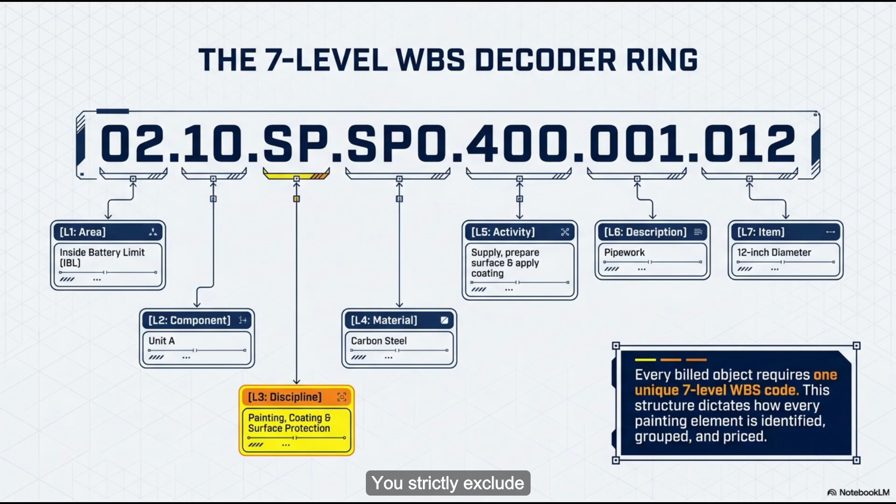And then you look at how they handle pipework, and the spatial logic just completely shifts. Well, pipework is a whole different beast. Yeah, the preambles say pipes are measured in linear meters along the center line, and you measure straight through inline fittings like bends, elbows, and tees. But, and this is the part that got me, you strictly exclude inline equipment like valves. Yep, valves are explicitly left out of that linear measurement.

Which, if I'm looking at this just from a geometric standpoint, an elbow joint is really just a bent cylinder. The surface area math is pretty constant compared to a straight pipe. But a valve is a topographical nightmare. It's a complete nightmare. I mean, a valve, especially a large motor-operated valve or a control valve, introduces massive mechanical complexity. Right, because of all the moving parts. Yeah, you've got exposed stems, moving actuators, flanges, really delicate seals.

A contractor applying heavy industrial epoxy can't just spray over a valve the way they would a straight run of carbon steel. Oh, because if you spray it, you just glue the whole thing shut. Exactly. If that coating fuses the valve stem, you've completely disabled a critical control mechanism for the entire pipeline. So the preamble forces a completely different pricing structure there. So how do they price it then? Valves are enumerated. You literally count them one by one, categorize them by diameter and type, and then you price that meticulous brush-applied labor completely separately.

Okay, that makes sense. But that brings us to the rule that seems to carry the most hidden financial risk for a contractor. Corrugated or profiled steelwork? Oh, yeah. This is a big one. The preambles literally state this material is measured strictly by its net plan or elevation area, meaning there is absolutely no extra allowance for the added surface area created by the peaks and valleys in the metal.

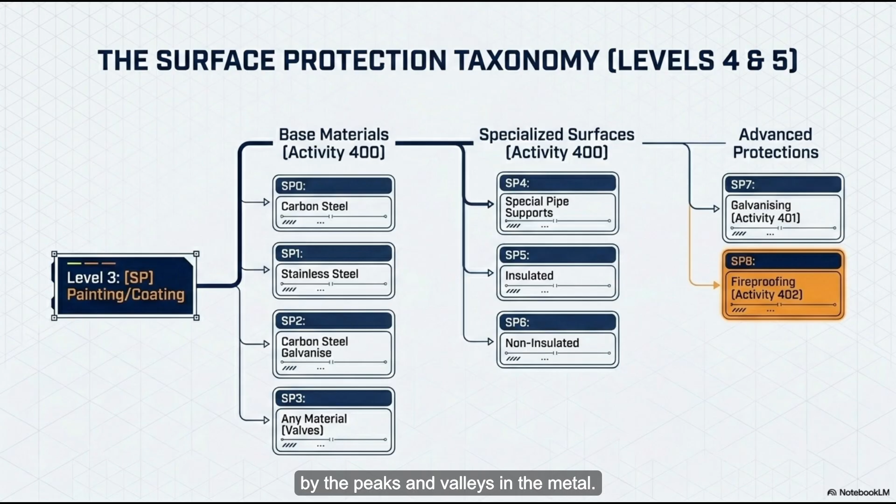Not at all. So wait, if I'm a contractor, it's like I'm agreeing to paint a flat piece of paper for $10. But when I show up on site, that paper is folded into a complex origami crane. That's a great way to put it. And I'm only getting paid for the 2D footprint of that crane. I just have to eat the cost of painting all those extra hidden folds. That is exactly what happens. The contractor is expected to understand the geometric reality of corrugated steel long before they even submit a bid.

Wow. Yeah, so if a specific profile of corrugated steel has a surface area that's, say, 1.4 times larger than its flat footprint, the contractor just has to know that. Yeah, they have to calculate that corrugation factor themselves, and then they bake the extra labor and material costs into their initial unit rate, because the client is literally just buying the coverage area on their blueprint. Exactly right. The burden of calculating the physical reality of the metal falls 100% on the contractor.

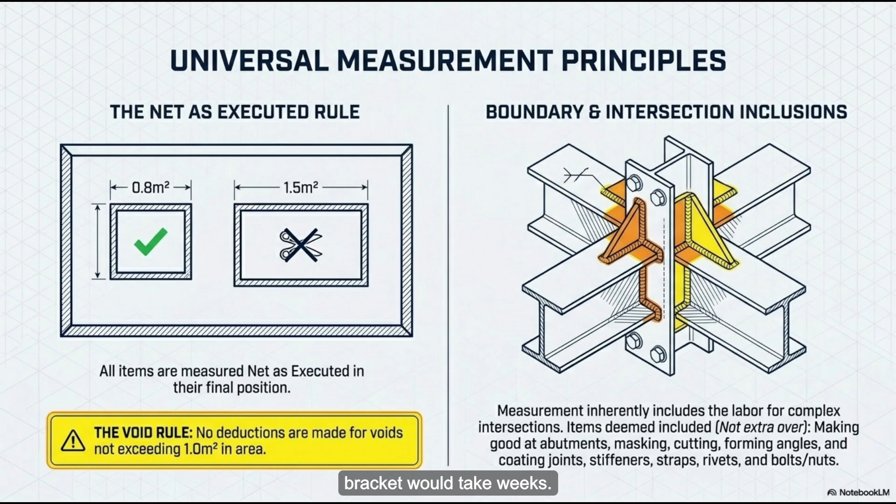And that burden even extends to how they categorize different objects, right? Like general structural supports are measured by weight in kilograms, but completed ladders and handrails are measured in linear meters. Yes, the physical metric literally changes based on what's the most efficient way to capture the labor cost. So weighing a bucket of hundreds of complex steel pipe brackets is a much more reliable proxy for the labor required to paint them, right? Because calculating the surface area of every individual tiny bracket would take weeks. Exactly. It's all about finding the most practical proxy for the work.

And all of these measurements eventually feed into what the contract calls a composite rate. The composite rate. Okay, let's talk about that. Because when an employer pays this rate for supply, prepare surface, and apply coating, the actual spraying of the liquid paint is basically the cheapest, fastest fraction of the entire job. It's the tip of the iceberg. The rate is actually funding this massive, incredibly strict scientific ecosystem of preparation and environmental control.

Right, let's unpack that prep phase. Because the preambles mandate that the unit rate covers solvent washing to strip away machine oils, and then it's followed by abrasive blasting to take the steel all the way down to its raw state. Yep, all the way to bare metal. I'm assuming this isn't just about making the metal look clean. There has to be a mechanical necessity for blasting the steel before you put epoxy on it. Oh, there is. Heavy industrial coatings just do not stick to smooth surfaces. They just slide right off.

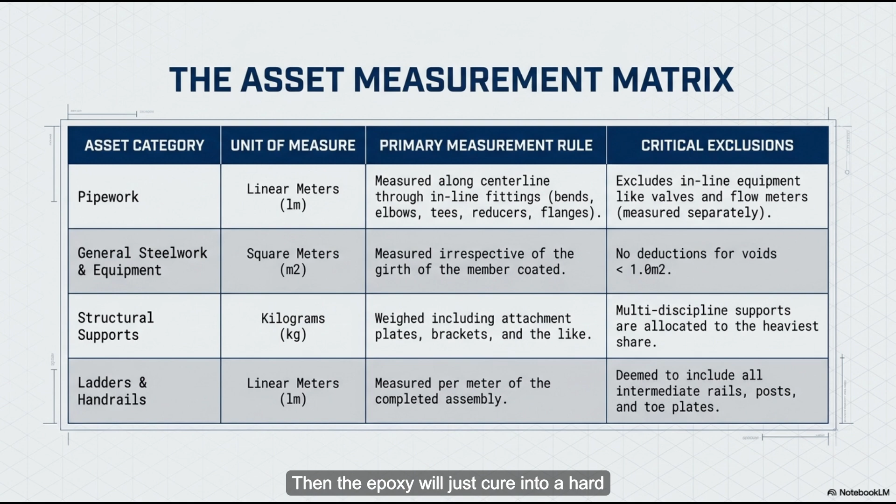Basically. So abrasive blasting fires grit at the steel at extreme velocities to create what we call an anchor profile. An anchor profile? Yeah, it microscopically shreds the surface of the steel. It creates these tiny jagged peaks and valleys. So the paint has something to hold on to? Exactly. When the epoxy is applied, it flows into those valleys and cures, and that creates a really profound mechanical lock with the steel substrate. And if you leave a little oil on the surface or you don't get a good anchor profile, then the epoxy will just cure into a hard shell that eventually peels off in massive sheets. It's a complete failure.

Good grief. And the preamble actually goes even deeper into risk mitigation during this prep phase. It specifically mandates the masking of welds. This is a really crucial detail. Right. The contractor has to carefully protect all the weld seams, leaving them totally uncoated until after the pipeline has undergone hydro testing. Right, because hydro testing is where they check the structural integrity of the pipe. They fill the completed pipeline with water and pressurize it to levels far beyond its normal operating capacity. So they're stress testing the welds, but why can't the welds be painted first?

Because if a contractor applied a really thick, high-build epoxy coating over a weld before that pressure test, the coating is actually strong enough to temporarily plug a micro crack in the weld. Wait, really? The paint is that strong? It is. So the pipe would pass the pressure test and then go into live operation carrying hazardous chemicals. Oh, no. And eventually, the crack would propagate right through the paint, causing a catastrophic failure.

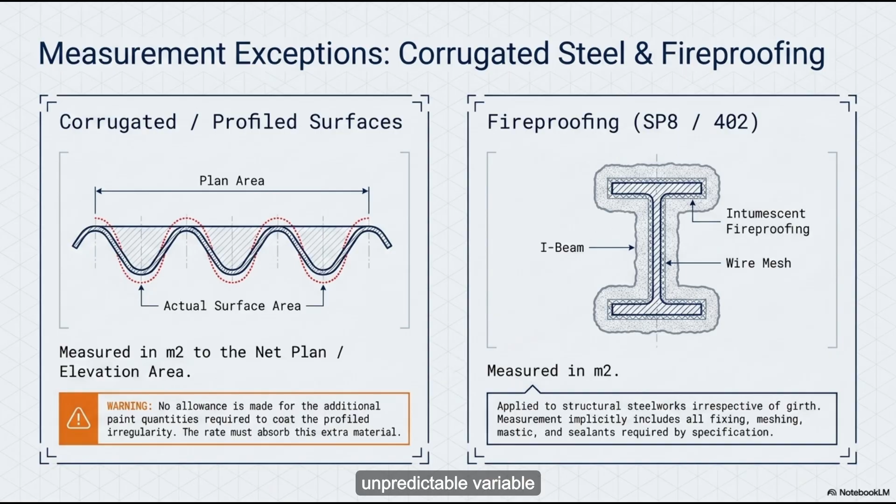That is terrifying. So the contractor is essentially being paid to not paint, wait for the mechanical engineers to stress test the system, and then mobilize their crews a whole second time just to unmask, prep, and coat those specific weld lines. Yep. It's a massive logistical dance. And honestly, this entire dance is governed by what might be the most unpredictable variable in the whole contract. Which is what? The weather. Exactly. Ambient conditions. The composite rate explicitly includes testing to ensure compliance with temperature, relative humidity, and the dew point.

Does this mean the painting contractor is legally and financially on the hook if the humidity or temperature is wrong on painting day? Like they have to act as local meteorologists. They absolutely do. And the dew point is the really critical metric here. Okay, break that down for us. Why the dew point? Because paint curing is a chemical reaction that is highly sensitive to moisture. If the temperature of the raw, freshly blasted steel is too close to the dew point of the surrounding air, invisible condensation forms on the metal. So the steel looks dry, but it's actually wet. Exactly.

So the contractor isn't just applying paint to steel. They're unknowingly applying paint to a microscopic layer of water. And I'm guessing the epoxy doesn't like water. Not at all. The epoxy will happily bond to the water instead of the steel anchor profile we just talked about. Oh, wow. And the moment that moisture evaporates or the steel expands under the hot sun, the coating completely fails. And because the FIDIC contract legally embeds that compliance with ambient conditions directly into the unit rate, the contractor absorbs the entire cost.

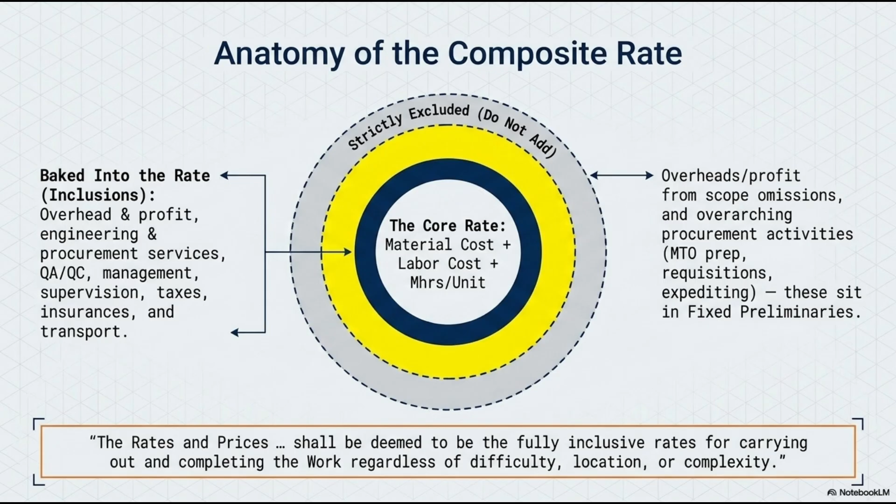If they rush a job on a morning with high humidity and the coating fails an adhesion test 2 weeks later, they pay for it all. Erecting the scaffolding, reblasting the steel down to bare metal, reapplying everything, all out of pocket. That's insane. You're managing hundreds of workers, coordinating with pipe layers, and your entire profit margin is tethered to a literal hygrometer. It really is.

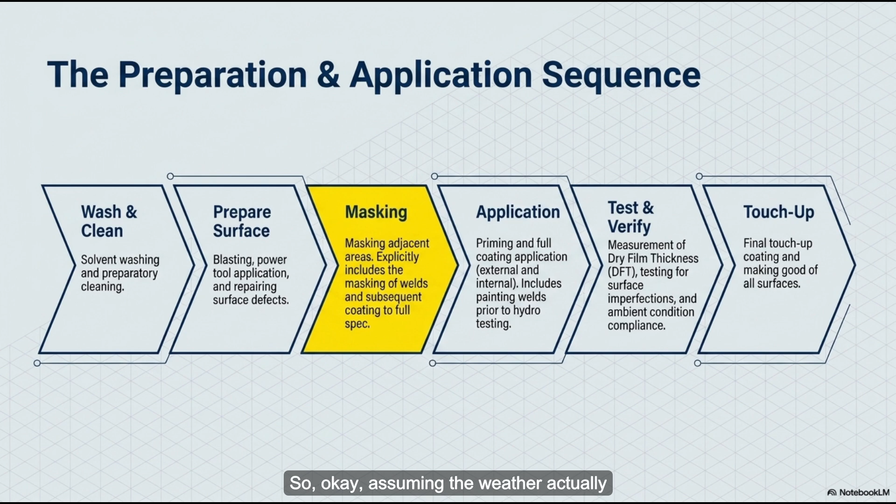So, okay, assuming the weather actually holds and the surface is prepped perfectly, the contractor then has to navigate the WBS codes. Right. A work breakdown structure. Yeah, this is a 7-level alphanumeric matrix that categorizes every single physical object on the site. And level 4 codes specifically dictate the chemical approach, right? Like you have SP0 for carbon steel, SP1 for stainless steel, SP2 for galvanized carbon steel. Yeah, the WBS code is basically a translation layer between the engineering reality on the ground and the financial ledger.

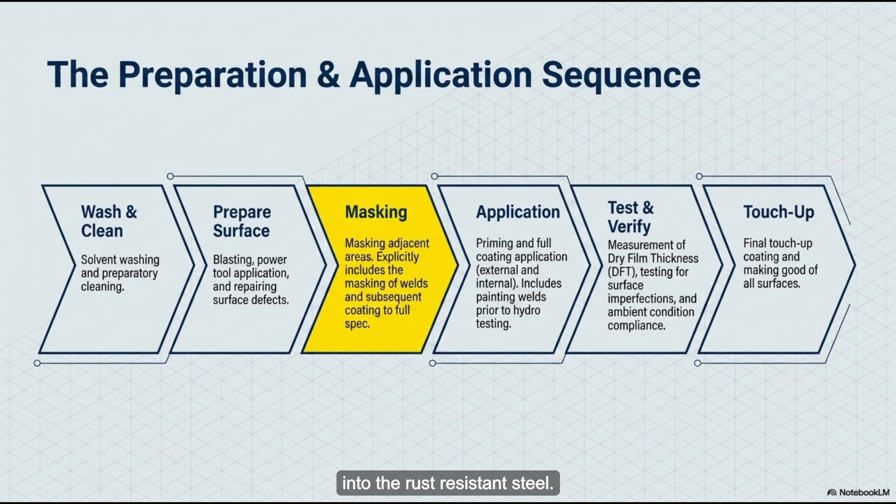Why do they need to separate them out so strictly, though? Paint is paint, right? Well, you cannot treat carbon steel and stainless steel with the same abrasive blasting protocol. Oh, really? Why not? If you blast stainless steel with the same aluminum oxide or steel grit that you just used on a carbon steel pipe, you will actually embed free iron particles into the stainless surface. Wait, so you're basically shooting rust into the rust-resistant steel? Exactly. You will essentially infect a rust-resistant alloy with rust. It completely ruins the material.

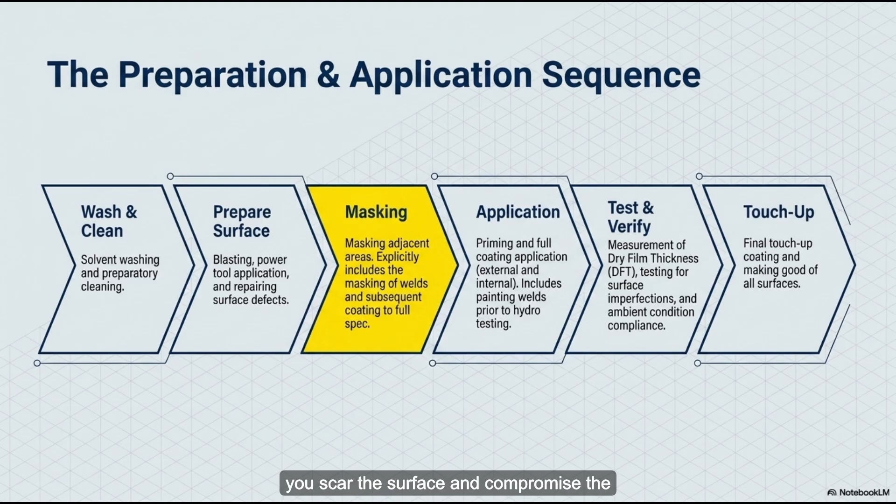Oh, man. It's similar to the strict protocols in a high-end commercial kitchen, right? Like, if you use a metal spatula on a cast iron skillet, it's totally fine. Right. But if you absentmindedly use that exact same metal spatula on a Teflon-coated pan, you scar the surface and compromise the entire nonstick function. That is a perfect analogy. The WBS codes ensure you never bring the wrong tool or chemical to the underlying substrate.

And the granularity of these codes is just staggering. I was looking at level 7, which categorizes pipe diameters. The schedule literally lists WBS codes starting at a tiny 1/4-inch pipe and goes line by line all the way up to massive 44-inch pipelines. And there's a very good reason for that. The labor mechanics shift drastically across those different diameters. How so? Like big pipe equals more paint? It's more about how you apply it. A 44-inch pipe presents a massive, relatively flat curve. So a painter can efficiently use industrial spray equipment to coat large sections really rapidly. Very little paint is lost to overspray. Right, because it's a huge target.

Exactly. But a 1/4-inch pipe, that's essentially just a thin line hanging in the air. So if you spray it, you waste a tremendous amount of incredibly expensive coating directly into the wind. So for those, the contractor often has to rely on slower, meticulous brush or roller applications. Oh, I see. So the WBS code isolates that specific inefficiency so the contractor can price the manual labor accurately.

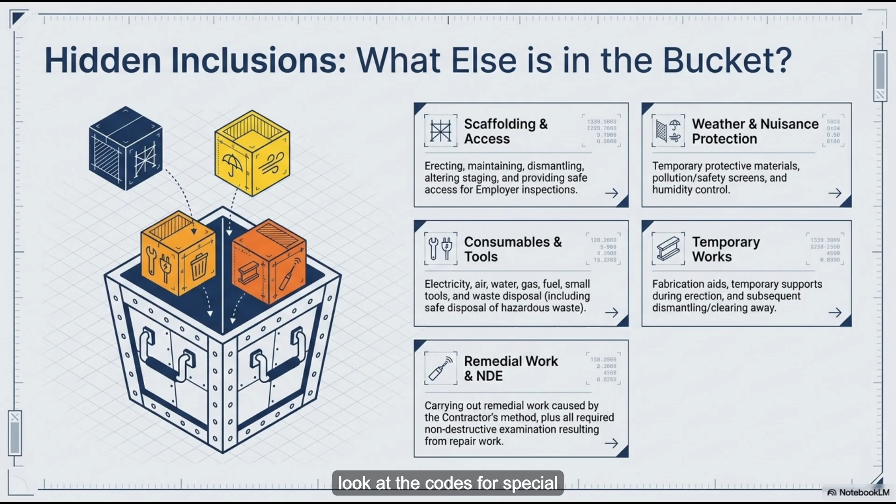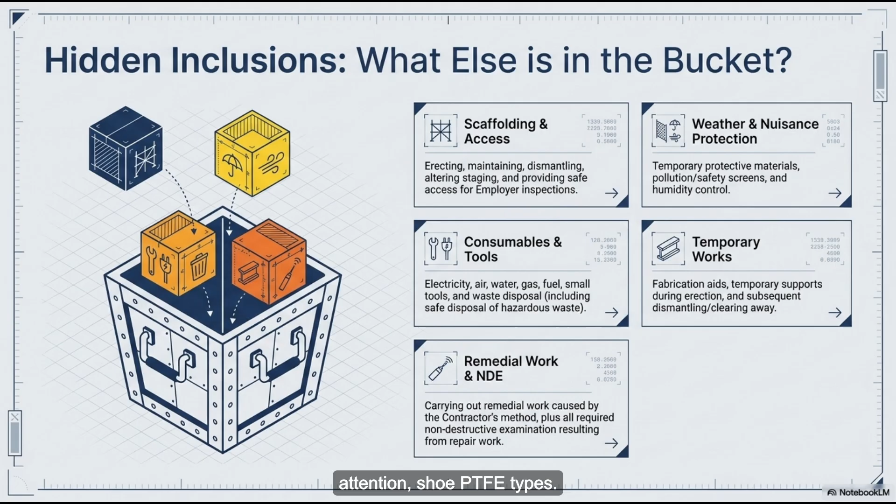Exactly. That structural complexity, though, really peaks when you look at the codes for special pipe supports. The preambles have specific designations for clamp types, spring hanger variable types, and the one that really caught my attention, shoe PTFE types. Ah, yes. PTFE is essentially Teflon, so we have heavy industrial pipes literally resting on Teflon shoes. Why? Because industrial pipelines transport materials at extreme temperatures. We're talking superheated steam or cryogenic liquids. Okay, so really hot or really cold?

Right. And steel pipes expand and contract significantly as the temperature fluctuates. If you were to bolt a mile-long pipeline rigidly to its concrete supports, the thermal expansion would literally tear the steel structures right out of the concrete. Wow, just from the metal expanding? Yeah, the forces are massive. So instead, the pipe rests on a Teflon shoe. This allows it to slide back and forth with very low friction as it grows and shrinks.

That is brilliant engineering, but painting around that has to be awful. It's incredibly difficult. Painting around a dynamic load-bearing sliding mechanism requires immense precision. Because if you get even a little bit of industrial epoxy on that Teflon sliding surface, you've just introduced friction. Exactly. Which defeats the entire engineering purpose of the support in the first place. Unbelievable. So every single WBS code represents a unique physical constraint. But after navigating the measurement quirks, the surface prep chemistry, all those alphanumeric codes, we finally reach the last layer of the preamble, the actual function of the coating itself.

Right, because in these industrial environments, the top coat isn't just a physical barrier. It serves a critical informational role. Yeah, the preambles mandate the inclusion of complex color coding systems, identification banding, flow arrows, product legends. The paint is literally the primary user interface for the facility.

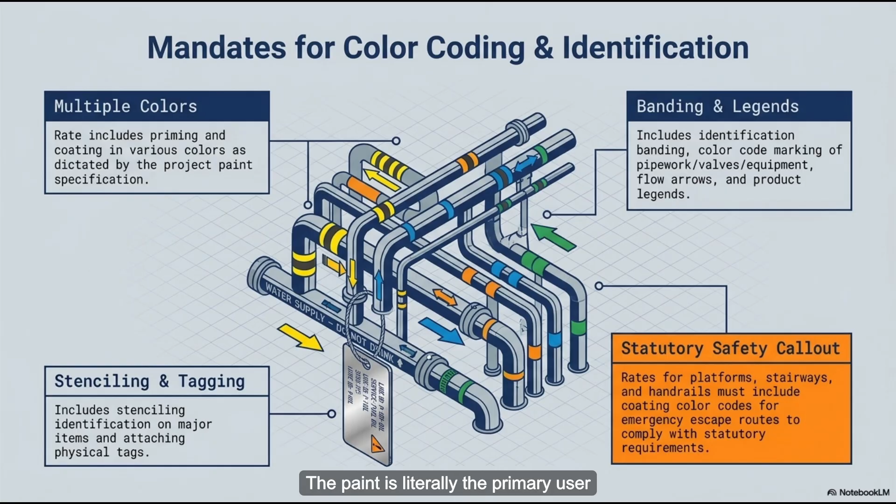It really is. Think about a processing plant containing thousands of identical-looking steel pipes. Visual communication in that space is a matter of life and death. Absolutely. A worker, or say an emergency responder, they need to know instantly from 50 feet away whether a specific pipe is carrying pressurized firewater, highly corrosive sulfuric acid, or lethal hydrogen sulfide gas. The pipes might be heavily armored, but they're basically wearing name tags and giving you directional instructions so you don't get lost, or worse, in an emergency.

Exactly. And the contract explicitly ties this color coding to statutory safety requirements. Right, like the rates for coating platforms, stairways, and handrails. They expressly include specific color coding for emergency escape routes. The literal paint on the handrail dictates the path you have to take when the alarms sound. It's your lifeline. And to really understand the extremes of this protective infrastructure, we have to look at two highly specific WBS codes at the far ends of the spectrum, SP7 and SP8.

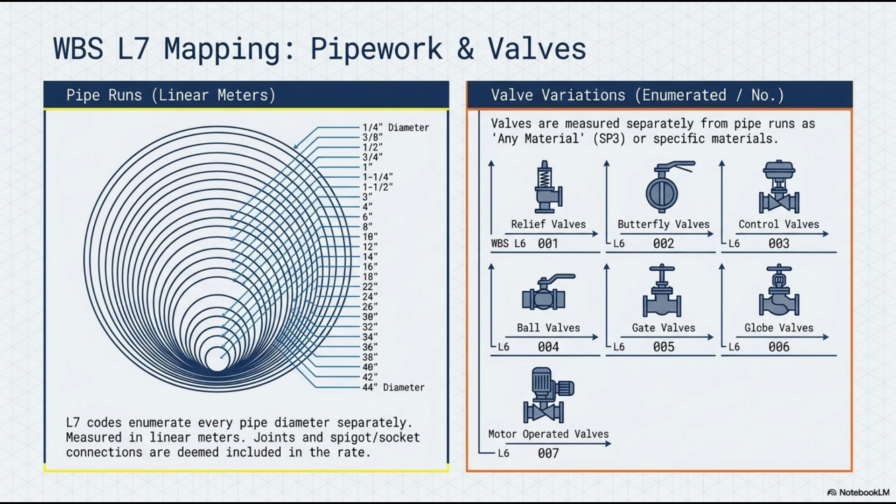Let's start with SP7, galvanizing. The source text makes it clear this isn't a liquid paint at all, is it? No, not at all. It's a metallurgical process. It's where the steel is fundamentally bonded with a layer of zinc, and the zinc acts as what we call a sacrificial anode. Okay, explain the mechanism behind a sacrificial anode. How exactly does bonding zinc to steel prevent the steel from rusting? It relies entirely on electrochemical principles. Zinc is simply more electrically active, or what we call less noble, than carbon steel.

Okay, so when they're bonded together... Right, when the two metals are bonded and they're exposed to an electrolyte like, say, salt water or heavy industrial humidity, a galvanic cell is formed. Kind of like a battery. Very much like a battery. And in this cell, the zinc willingly gives up its electrons to the steel. The zinc is what corrodes and degrades over time. It literally sacrifices its own atomic structure to keep the carbon steel beneath it completely pristine. That is just a fascinating passive defense system. It's taking a bullet for the steel.

Essentially, yes. And then we have SP8, which is fireproofing. The preambles detail that fireproofing rates include fixing, meshing, mastic, and sealant, all measured in square meters of the structural steelwork. This implies we aren't just rolling on a flame-retardant paint. We are building a serious physical barrier. Oh, absolutely. Because structural carbon steel actually loses a massive percentage of its load-bearing capacity when it reaches roughly 500 degrees Celsius. Which in a hydrocarbon fire, I assume happens pretty fast. In minutes. Temperatures hit that threshold incredibly fast.

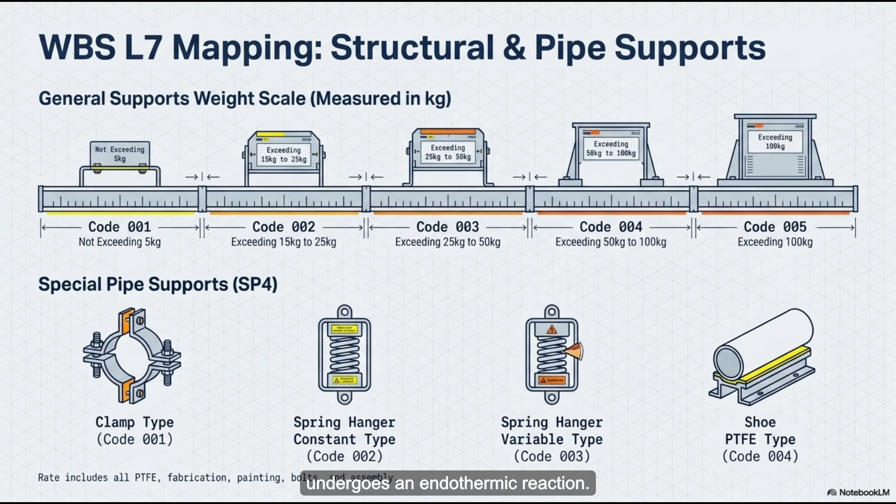So industrial fireproofing actually involves welding metal pins to the beam, then wrapping the steel in wire mesh, and troweling on this incredibly thick cementitious mastic. Wow, so it's practically concrete. Yeah, it's thick. And this mastic contains chemical hydrates. So when it's exposed to extreme heat, it undergoes an endothermic reaction. Meaning it absorbs heat. Right. It releases water vapor that literally absorbs the thermal energy from the fire.

That's incredible. So the sole purpose of that SP8 coating is to just buy the structural steel an hour or two of time before it hits its critical failure temperature. Exactly. It just buys the steel enough time so the structure doesn't collapse while the workers use those color-coded handrails to evacuate. Precisely. It is a highly calibrated, mathematically priced delay mechanism.

We started this deep dive looking at a simple coat of paint. But digging into these FIDIC Red Book preambles reveals this massive, invisible, high-stakes infrastructure that's required to apply that coating in an industrial setting. It's so much more than just the liquid in a bucket. It really is. You are looking at a surface that was meticulously measured by its net plan area, blasted to a microscopic anchor profile, painstakingly tested against the ambient dew point, tracked by an alphanumeric WBS code, and then engineered to sacrifice its own electrons to maintain the structural integrity of a multi-billion-dollar facility.

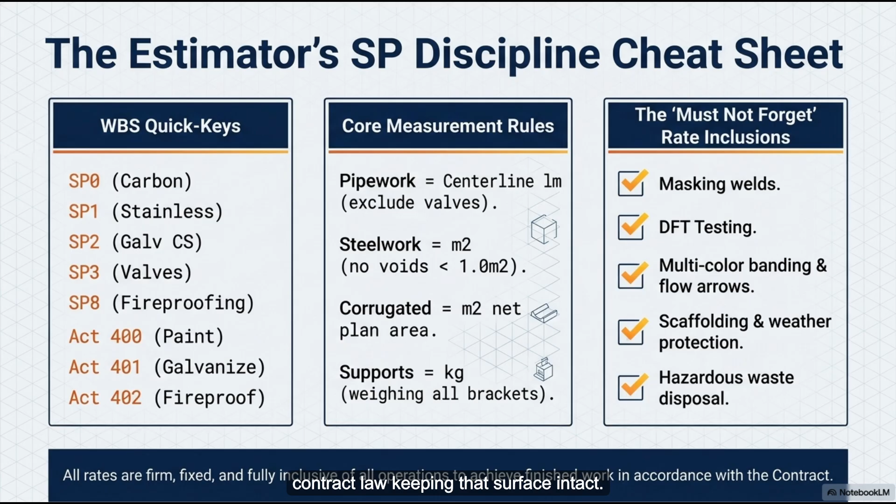It completely reframes how you look at the built environment, doesn't it? Totally. If a single millimeter of industrial coating requires this much legal, mathematical, and thermodynamic infrastructure just to exist, how much invisible, unwritten data is holding together the bridges, the tunnels, and the buildings you interact with every single day? That is wild to think about. Next time you walk past a painted steel column, remember the sheer volume of engineering and contract law keeping that surface intact. Thanks for joining us on this deep dive.